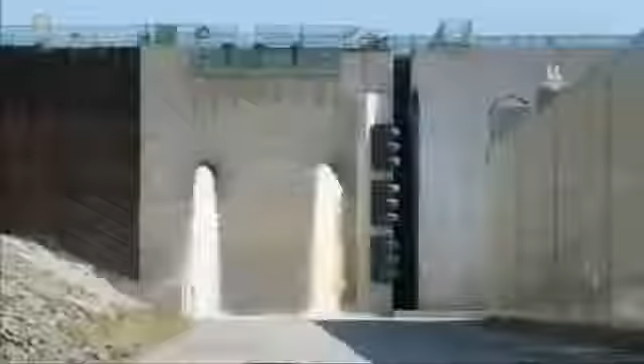Your next vacation may be spent in a paradise you've never heard of. You'll just need a way to get there. Here's the catch. That way has to go underwater. It would become the deepest immersed highway on Earth. Oh, they also have to build a couple of bridges. And did we mention the typhoons?

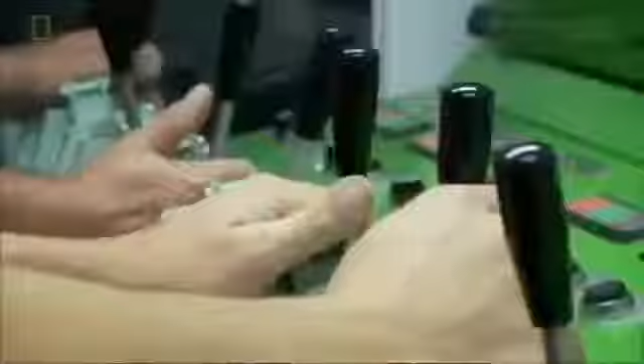These tugs are towing a contradiction. A tunnel segment that's both colossal and fragile. Come back, close. Slow down. A raft of techno breakthroughs and untested results. Bound for a place few know, to entice the world to visit. And even sway the choice for the Olympic Games.

Busan is South Korea's second largest city. 4.2 million people. Bigger than Madrid, closing in on Milan, and as hectic as Manhattan. South Korea is an Asian tiger, and Busan makes it roar. Its skyline will soon include one of the world's tallest buildings. It's the nation's biggest port, and the 5th busiest in the world.

Every 3 seconds, they unload a container. It's so busy, they had to build the sprawling Busan New Port. And still, Busan grows. Busan is such a comer, it's bidding for the 2020 Summer Olympics. But Busan has one big problem, and it's on display here at one of Asia's biggest fish markets. Dozens of vendors cram in here, 14 hours a day, every day of the year. And that's the trouble with Busan. It's so crowded, it's running out of room.

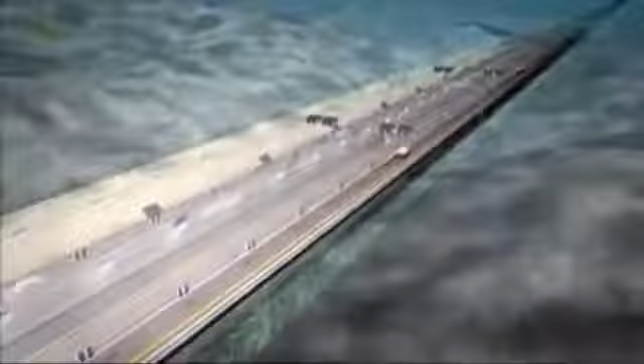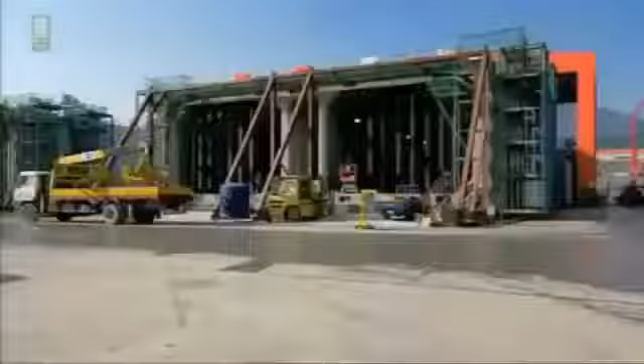The tunnel will be composed of 18 mammoth segments, each as long as 2 football pitches and as heavy as an aircraft carrier. Wide enough to carry 2 lanes of traffic each way, with an access tunnel between. That's the concrete reality. Now, here's where it gets dicey. Each segment has to be carefully towed into position, then carefully sunk to the seabed. And all the segments have to align within 35 millimeters, less than a thumb's width.

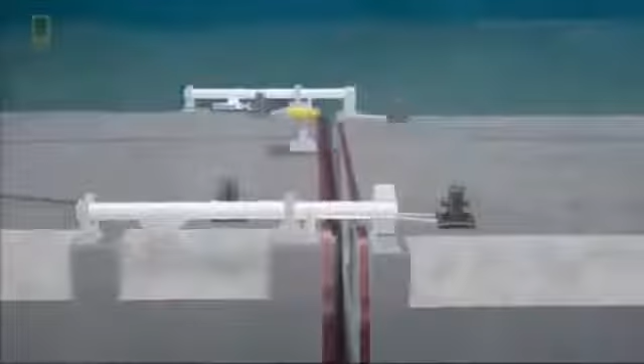Weather adds its own demands. This site is exposed to the open sea. There are always high waves, and the water is deep as well. It is wide open to the Northwest Pacific Ocean, so we have extreme exposure conditions for the construction period. So we've got to be ready for whatever that sends us, like big swell waves, strong winds, and even the occasional typhoon.

Building a tunnel like none ever seen will take techniques like none ever tried. Yet the Koreans have never built an immersed tunnel. But this country has. The Dutch have 5 centuries of experience at holding back the sea. Tunnel immersion is actually a Dutch speciality. If you look at the number of immersed tunnels in the world, most of them are in the Netherlands.

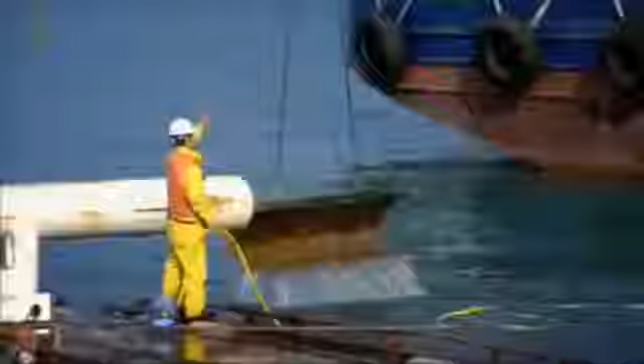Construction begins with the tunnel entrances. One on Gaduk Island, the other near an uninhabited island. From here, engineers will dig down to 12 meters below sea level to meet up with the undersea tunnel segments. But they won't tunnel through the seabed itself. If they did, the gradient would be too steep for driving. Instead, Peter's crew will lay prefabricated tunnel segments on the seabed.

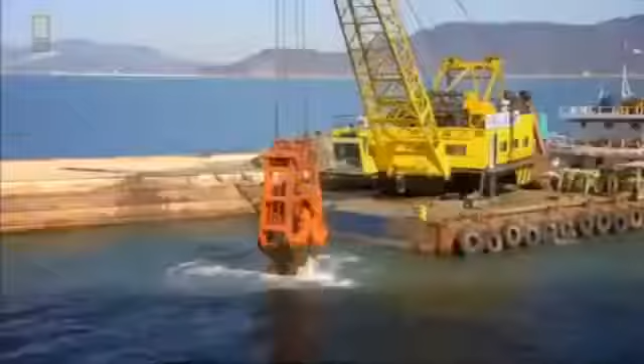First, engineers dredge a trench where the tunnel will rest. To buttress the foundation, they bore concrete columns into the seabed, stopping 3 meters shy of bedrock. The reason? Earthquakes. Avoiding bedrock will give the tunnel crucial flexibility. The segments will rest on a bed of gravel to ensure an even surface.

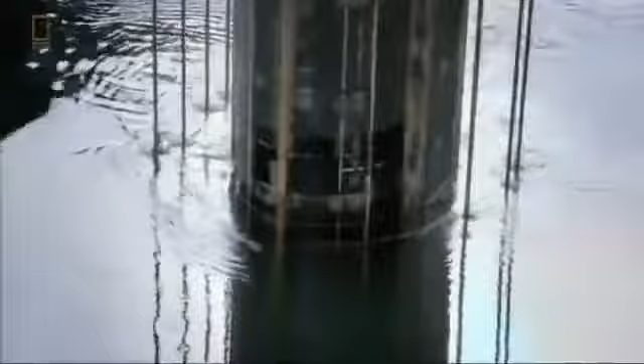Because the bed determines the exact height of each tunnel segment, the gravel must be placed with pinpoint accuracy. Later, the entire tunnel will be covered with thousands of tons of crushed rocks to protect it from collisions with ships or anchors.

Because the tunnel segments will be prefabricated, the first challenge is finding land for a construction yard. Not an easy task in Busan. If you look around, there's not a single metre of flat land anywhere that a contractor can use as a base for the construction period. From the tunnel site, the closest spot lies 35 kilometres away. It's big enough to build up to 5 tunnel segments at a time.

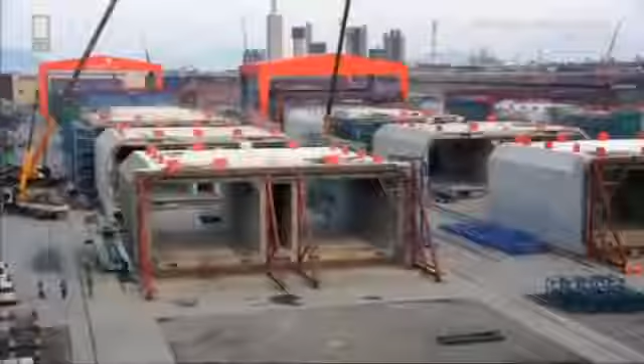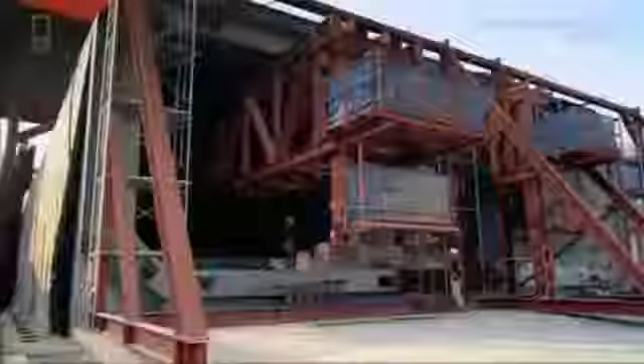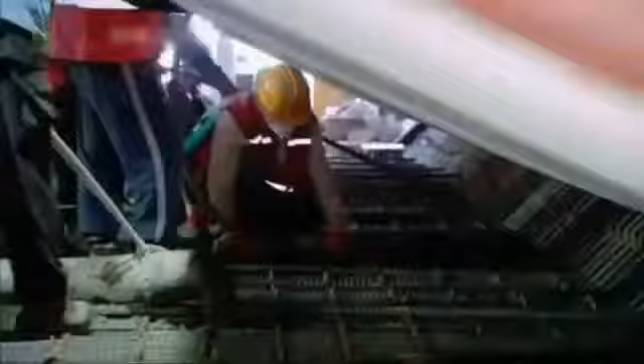Each segment weighs about 48,000 tons and is made of 8 subsections, each twice as long as a London bus. Anyone with a basement knows water can penetrate concrete joints, potentially disastrous in an underwater tunnel. But each giant section is cast without a single joint, thanks to Korean ingenuity. We continuously poured full sections from the ground up to the top of the walls to eliminate gaps in the walls. A process lasting 24 hours.

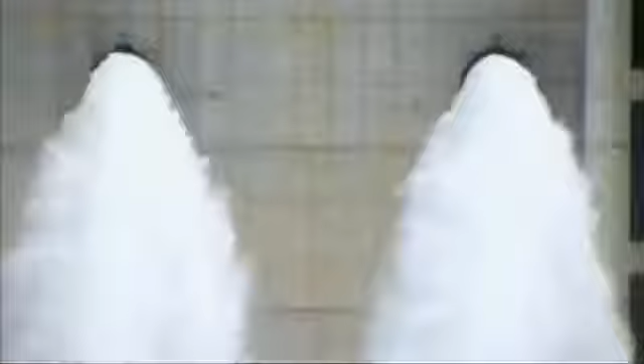After casting, the ends are sealed with steel bulkheads, a Dutch innovation best appreciated later on the bottom of Jinhae Bay. The bulkheads are watertight because these babies are about to take a bath. Flooding the dry dock will allow them to float the segments out to sea. The inundation of the dock takes approximately 48 hours.

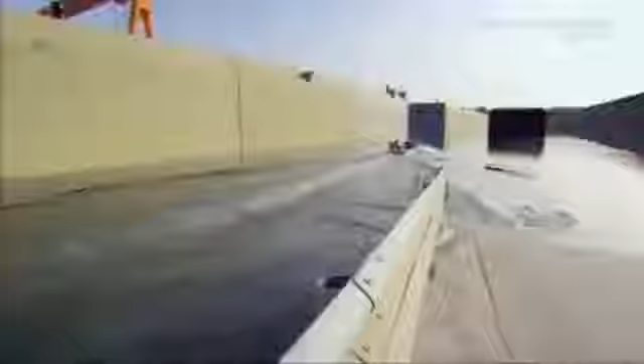During the first phase, we let in water until it reaches the level of the bulkhead door. Then we'll check to see if the bulkheads are leaking. Once all the leaks are repaired, or if there are no leaks, we'll fill up the dock completely. It's enough water to fill 230 Olympic pools. So how do you prep 48,000 tons of dead weight to float? Inside every tunnel segment, there are 6 ballast tanks, and they're filled with water.

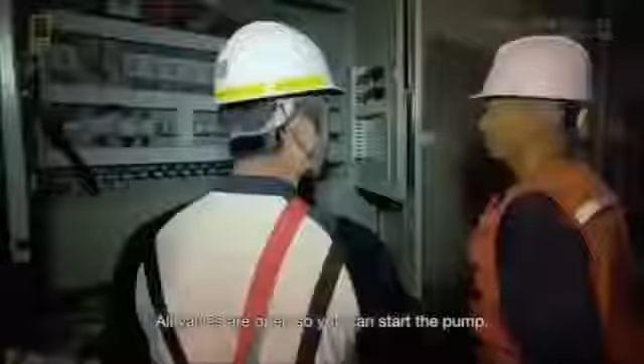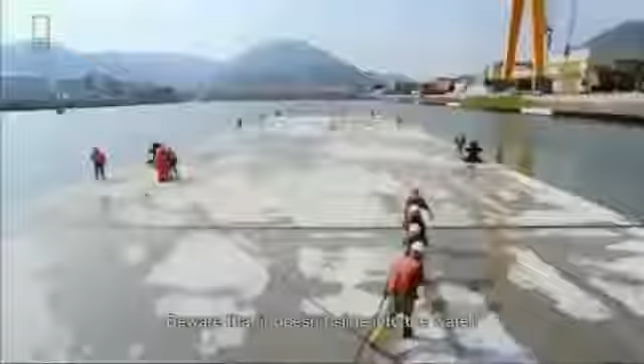To start the flotation process, we begin pumping out the water. We continue until the tunnel segment starts floating. So what the tugboat has to do is to tow that slow. Then with the other winches at the backside, we control the tunnel element's sideways direction. Now they can begin to warp out the segment. Removing the first segment takes brawn and finesse to avoid colliding with the dry dock. With barely 2 meters on each side, there's no room for error.

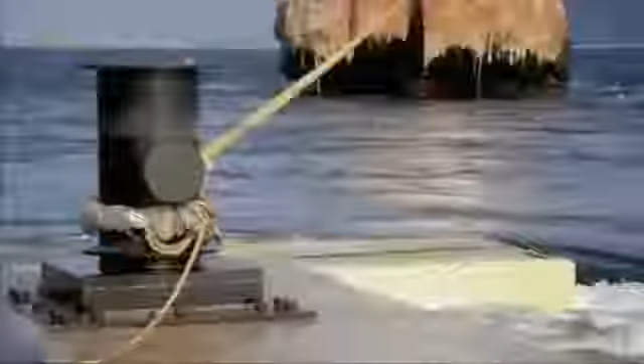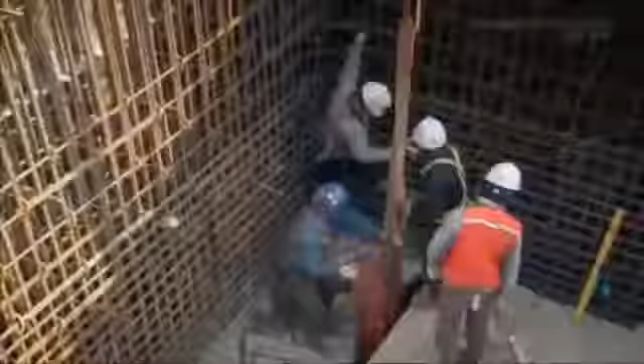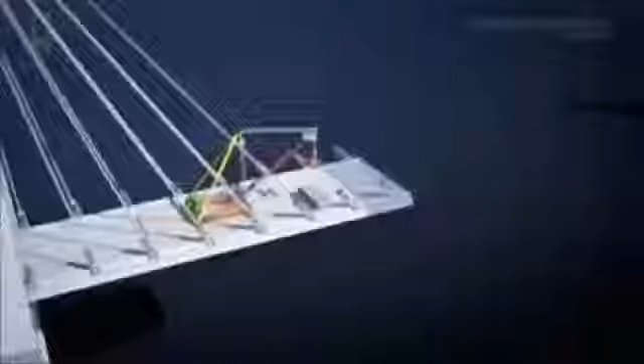Believe it or not, clearing the dry dock was the easy part. While work continues on the undersea tunnel, the rest of the Busan-Geoje fixed link starts to rise. 2 giant bridges. One with 3 pylons, the other with 2. At its topmost, the 2-pylon bridge will soar 156 meters above sea level, the height of a 50-story building. The span between the pylons will stretch the length of 5 football pitches, with enough room for the tallest freighters to pass under. Crucial for a city that thrives on shipping for its livelihood.

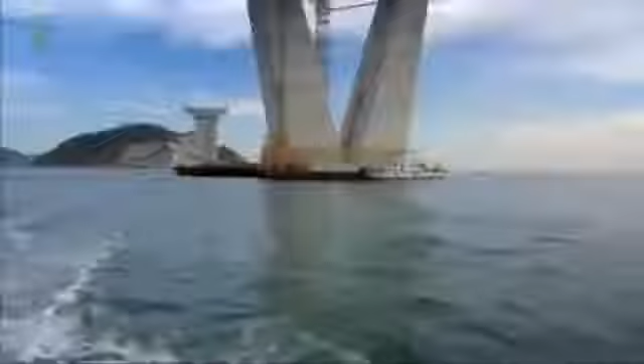The most pleasing aspect of the bridge is also the most daunting: its curved diamond shape. Of course, curved pylons are very difficult to construct, but they're very much in harmony with the surrounding scenery in many ways, in that they bear resemblance to a mother's praying hands and to the wings of seagulls.

35 kilometers away, the first 5 tunnel segments arrive at a temporary mooring site. From here, they'll travel across Jinhae Bay to their resting place on the sea floor, already leveled and lined with gravel. And here's how they'll get there. Pontoons the size of a mansion. Dutch designed, Korean made. One pontoon is positioned near each end of the tunnel segment.

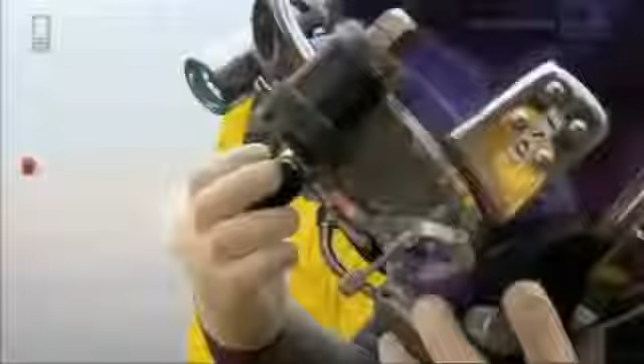After arrival at the tunnel site, mammoth winches on pontoons will lower the segment to the seabed. At least, that's the theory, because it's never been done in the open sea. A specialist diving team prepares the first tunnel segment for the immersion operation. Divers test connections for data systems and power supplies. Standing by. And remove marine growth from the bulkhead.

Down on the wire, please, Steve. Down on the wire. Finally, they install steel wires underneath the tunnel segment, crucial for positioning during immersion. In a good position now, we can come up on the wire. Coming up on the wire. Above water, the crew are also adding a temporary access tower, so workers can enter the segment in case of trouble with the ballast tanks. Over, the tunnel is clear.

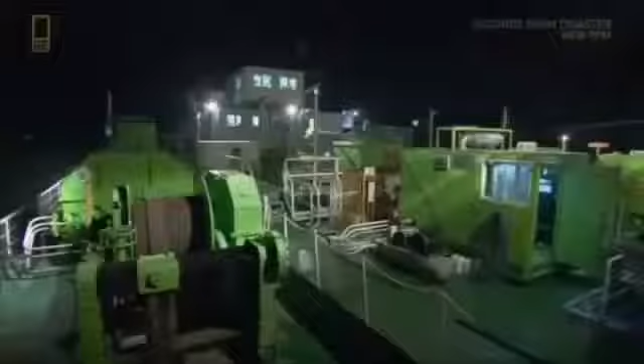Every problem has to be anticipated, because if things go south, they won't get a second chance. What we do doesn't have anything to do with luck. We know what's involved, we know how the process works, and we have the feeling we control the whole process. Not quite. Back in Holland, the rest of the immersion team stands by to fly out. In all, 56 men wait for Peter to say go, and he's waiting for a forecast.

When the wind blows from the south, swells roll in from the Pacific. Because we're situated offshore, we have to deal with waves. And these waves can be pretty fierce. Even swells barely 30 centimeters high pack so much force they could fracture the subsections that form the tunnel segment. Throughout its journey, the segment will be at the mercy of the waves, so the team needs 3 days of calm seas.

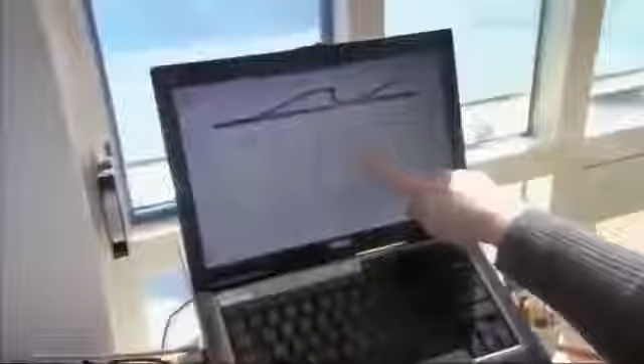Strukton looked around for a forecaster, but few dared to stick out their neck for such a costly guess. Then, a Danish company seized the challenge. They came up with a model to predict waves as small as 10 centimeters, up to 5 days out. A stunning breakthrough in forecasting. That means we're able to say, tomorrow we can do an immersion. And that means we're able to put people on the plane yesterday, really on a last-minute basis. It takes away a big risk for us and for our client.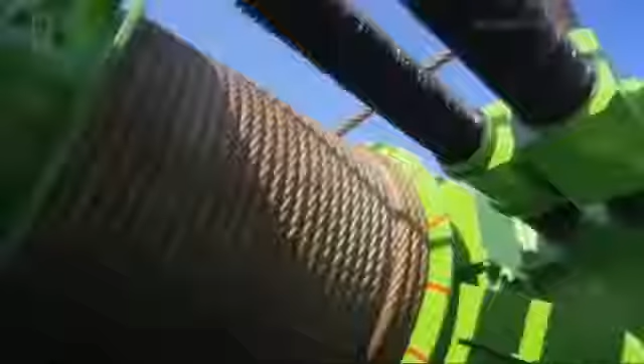We've got the weather. They're all showing the same prediction. The swell still not as bad. I would say we have a go. Green light. We'll try. Then we'll try it. Okay, thank you. Yes, bye-bye. Ahead lie 48 hours of tension for the boss. Six months of work rides on steel threads and a forecaster's guess. Tonight, no one will sleep soundly.

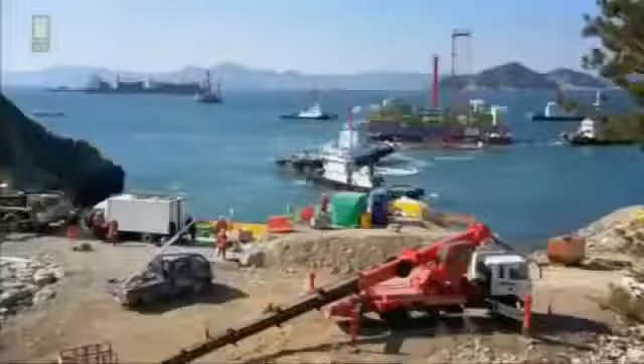After a cautious voyage at 3 kilometers an hour, the first tunnel segment arrives at Gadeok Island, the starting point of the tunnel. Joining Peter is the elite team fresh from Holland, among the few men on the planet who can do this job.

Aligning the segment takes painstaking accuracy. Surveyors take readings using a system of prisms and mirrors mounted on the access shaft and the survey tower. It's all new to the Koreans, so it takes time getting used to the technology.

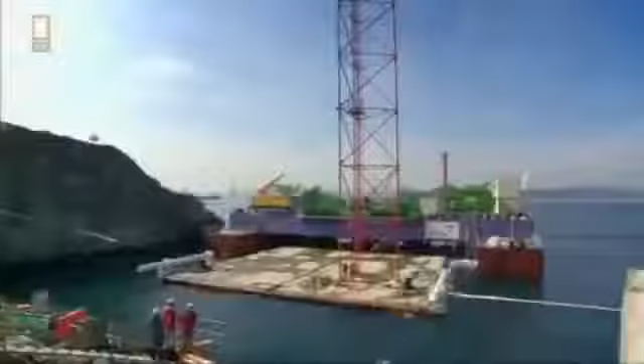The ordeal will take all day and end either with an engineering triumph or a 48,000-ton disaster. With so little clearance and so much at stake, the segment moves at a snail's pace. After a journey of 35 kilometers, it's now just 4 meters from the abutment.

We've worked really hard for half a year to prepare for this moment. 56 of our people are here to execute this operation. The Koreans are excited and tense because they've never witnessed this. We've done it more often, but still, a very special moment.

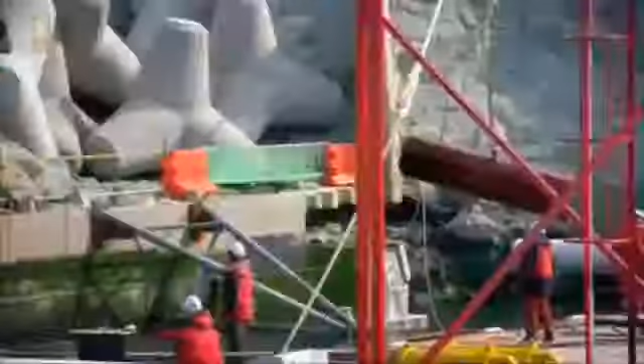Till now, steel plates have protected the leading edge of the segment. Easy down. Behind them is a component as crucial as it is fragile: a rubber gasket to ensure a watertight connection with the abutment. Now they're ready to begin the descent. Operated by remote control, the ballast tanks slowly fill. The command post monitors everything via remote control cameras, on the pontoons and inside the tunnel segment.

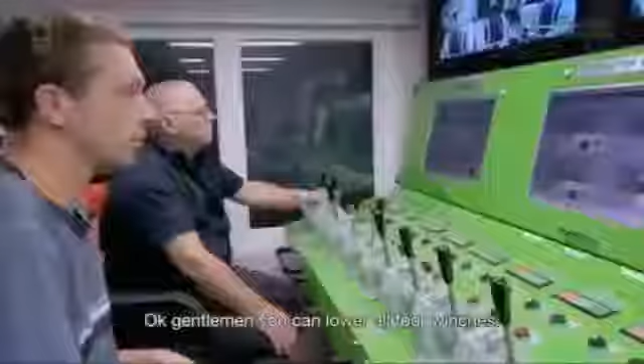The segment must align with the mouth of the tunnel to within 3.5 centimeters. You can imagine that if this segment were placed 10 centimeters off and you did that 18 times, you'd end up 2 meters off on the other side. Well, that wouldn't be very good.

7 hours later, touchdown. The segment now rests just 50 centimeters from the abutment, the mouth of the landward tunnel. To close the gap, engineers have installed a pair of powerful hydraulic jacks. Linking the jacks and applying tension closes the gap. The final stage begins from the landward side.

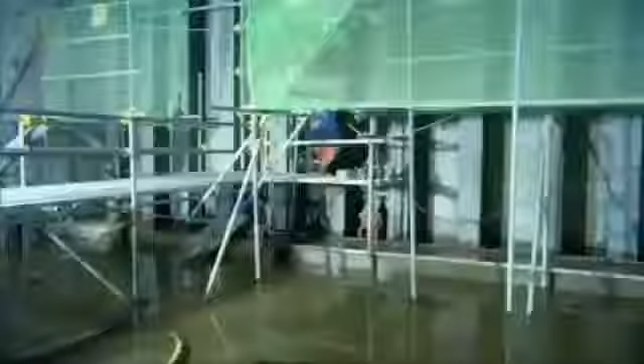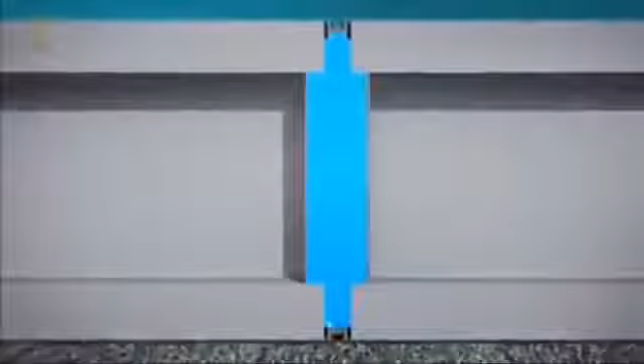A wall of water nearly 3 meters wide separates the segment from the abutment, what they call the immersion joint. Opening this valve will force the water out. As the immersion joint empties, external pressure will further compress the gasket for a watertight seal. The echo from the bulkhead reveals the water level in the joint. With the water drained, they can open the bulkhead door.

But the lock's jammed. You knew that it was going to break? Huh? Did you know that? Because you took the toolbox with you.

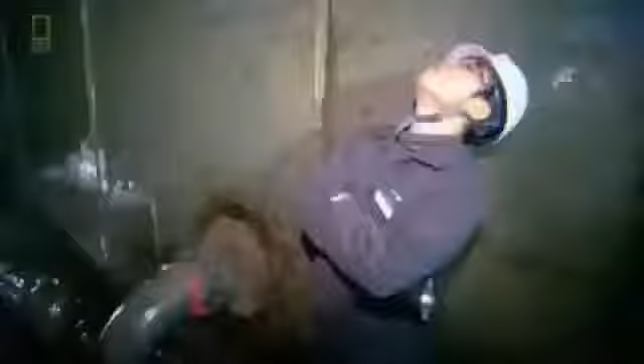This calls for cruder technology. All that stands between the crew and the first immersed segment is the steel wall installed back at the dock. And here is why it's so brilliantly simple. On other tunnels, engineers seal the ends of segments with concrete, then knock it out after immersion. But that takes time and creates debris.

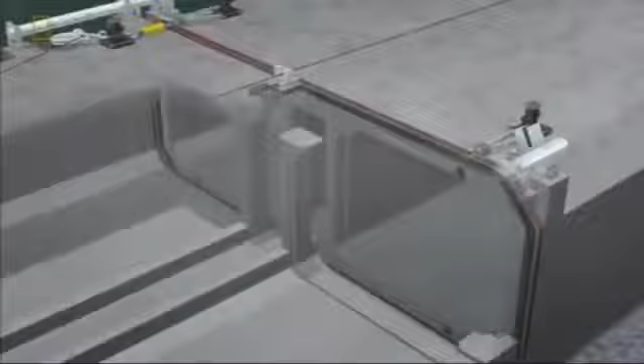The modular steel bulkheads are easy to install, easy to remove, and they'll be reused on every segment and eventually recycled. Faster, cheaper and safer. An engineering trifecta. Finally, open sesame. Although we experienced some unexpected things, we were very happy that it was completed successfully in the end. And the feeling of accomplishment was indescribable.

Their marathon operation lasted almost 78 hours. Some have gone 2 days without sleep. One down, 17 to go. And they won't all go smoothly.

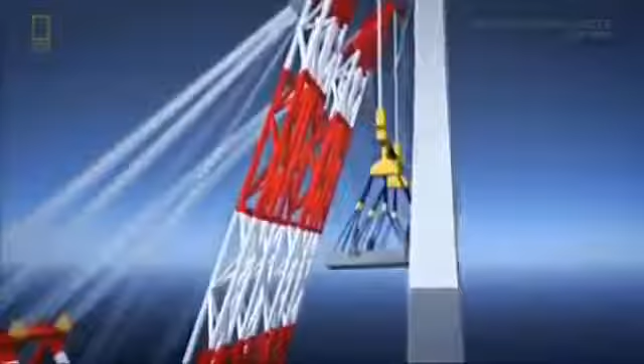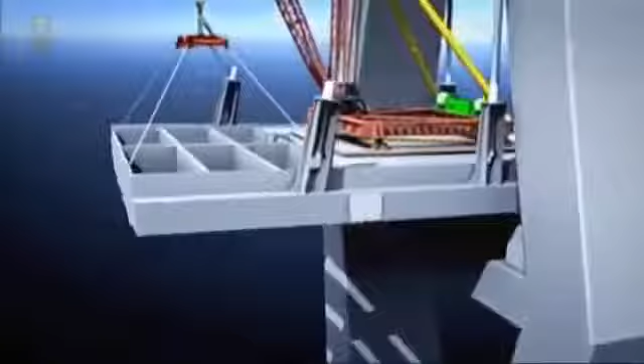Like the Busan tunnel, the bridges advance in segments, but 2 at a time, not 1. It's called balanced cantilever construction. Working outward, steel segments are laid on each side of the pylon to keep the bridge in balance. Then 2 cables are attached to brace the segments. Once they've done that, the derrick crane then lifts up 6 precast concrete panels and places them onto the steel frame.

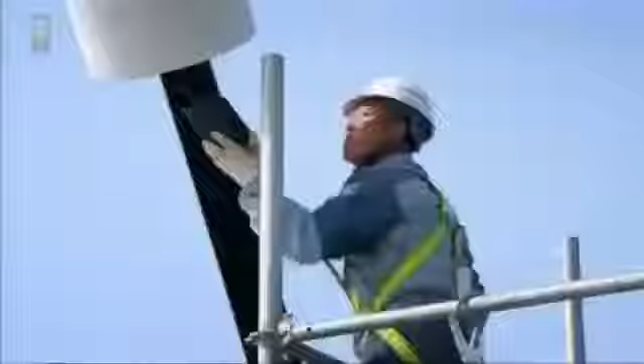Then put a final post-tensioning into the cables. And we're ready then to start the whole thing over again. Back at the tunnel, the team have installed 12 concrete segments. But now they're heading for 48 meters, the deepest water and the hardest challenge.

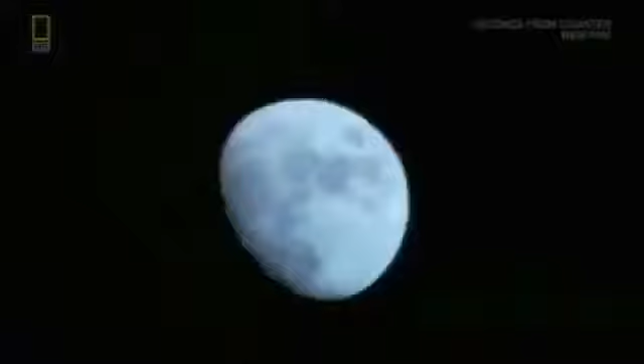New hurdles demand new techniques. The sea floor out here is soft clay, so they need to set anchors that can hold the segment and pontoons fast. Stevmantas, named for their fish-like shape. They're designed to dig in where other anchors lose their grip. Once segment 13 arrives here, 14 steel cables connected to the anchors will hold it in position.

But once again, deep water raises the stakes. Once the segment hits the bottom, suppose a problem arises with the ballast tanks. Somehow, Peter would need to get the engineers inside. On segment 1, they could use an access tower, but not in deep water. The solution is a first in tunnel immersion, a self-propelled diving bell. Purchased in America, the sub was refitted just for this project.

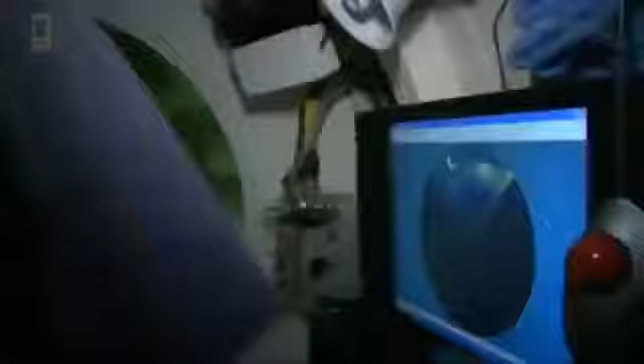We're coming down to 15 meters, see if we can get the tunnel on sonar. This is the tunnel element here. That's probably a bollard on the corner.

With a little boat like this that can go to 300 meters, you've got the concept of a ferry transferring people to the tunnel segment. It's 9 meters long, with room for a pilot, co-pilot, and 5 engineers. It can dock on a landing tower on the segment for watertight access to the tunnel.

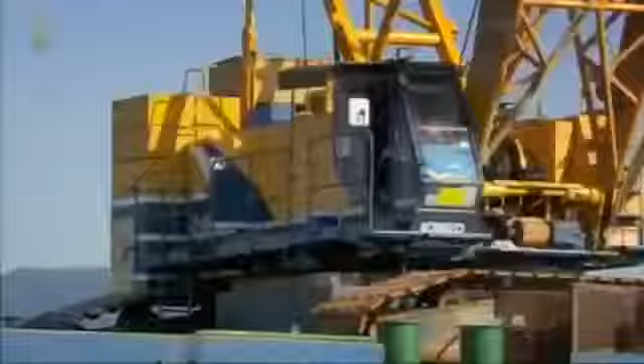Deep water poses another problem: monitoring the position of the segment as it's lowered, because one misalignment would be disastrous. To calibrate the position of the first segment, surveyors took readings from prisms mounted on the access tower. But remember, there's no access tower here. So once more, the Dutch devise a smart, simple solution. It's named for what it is.

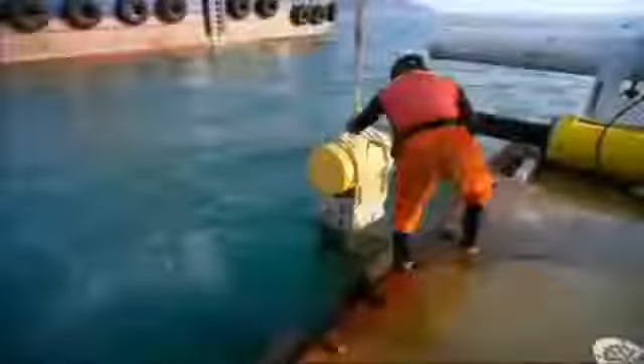A taut wire. One end attaches to the leading edge of the segment to be immersed. The other end attaches to the previous segment. The taut wire ensures the connection stays under high tension. Positioning the device is a delicate operation. This custom-made model is the only one in existence. Breaking it is not an option.

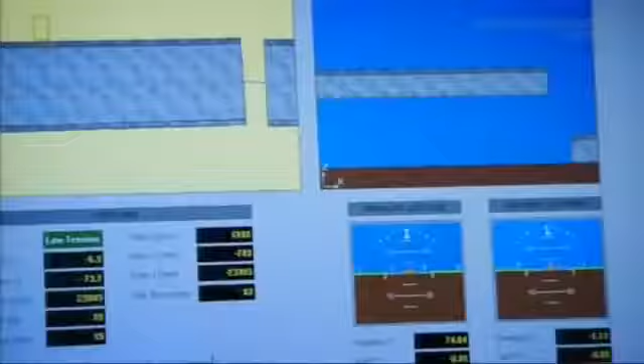When this segment descends, a computer will record the length and angle of the wire, allowing the team to monitor the segment's position. The taut wire is now under high tension between this segment and the previous one. And as the segment descends, the wire automatically retracts and becomes shorter. So that provides us with exact positioning data.

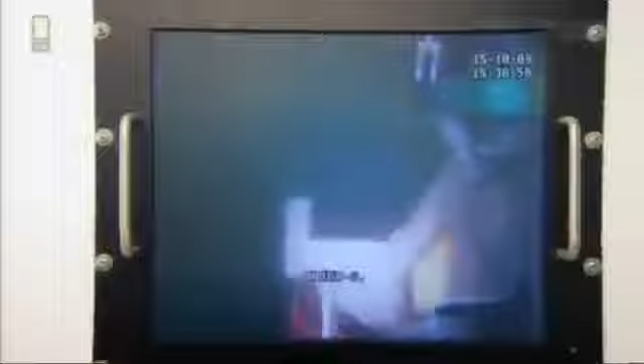To fine-tune the position of the segment on the seabed, 4 of these sensors are attached, one on each corner of the bulkhead. Another custom innovation for this project. And wait till you see how accurate they are. The whole operation is remote controlled from the command unit on the pontoon. With one click, they start filling the ballast tanks.

You can feel the tension building up now. And then we all have one question. Can we do it again? Can we get it in position? It's the same tunnel, but it's farther away from the coast. It's deeper, the weather, everything. So many aspects make it different every time, so you have to stay alert.

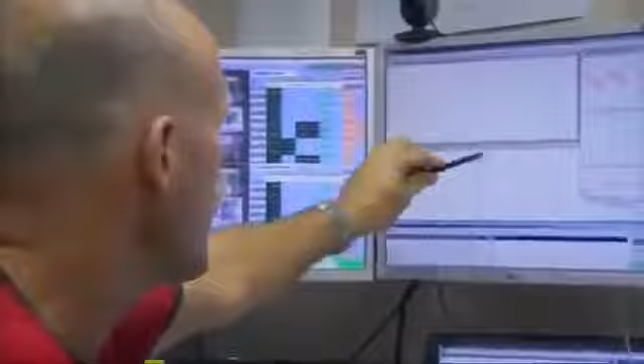All the data feeds into Peter's computer and refreshes the position of the segment every second. This is the tunnel where we have to go to. The green one is the final position, and this is where it is now. So you can see it's just below sea level.

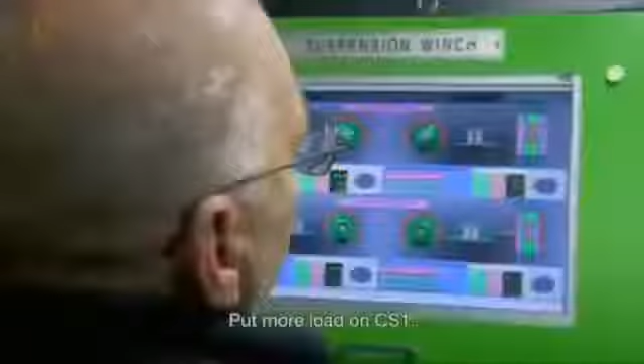Data from the winches allows him to adjust the segment during descent. It all happens like walking downstairs. One step forward, one step down. And the deeper it goes, the more careful the steps.

At this stage, where the tunnel is just a few meters underwater, there's no problem. We can still move in any direction. Nothing can hit it. But when we're approaching the segment that's already on the bottom, then I have very little clearance, so the steps I make will be a lot smaller.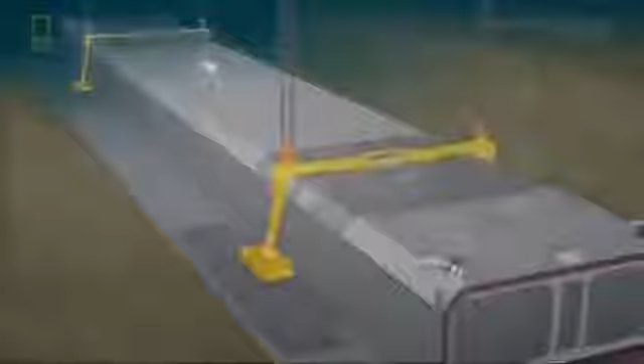The moment we pull them closer together, the guide beams become less flexible. The movement diminishes until the segment is motionless. With only 50 centimeters separating the segments, and in near zero visibility, a diver connects the hydraulic jacks. The segments seem aligned, yet the slightest error on this end will translate into a big mistake at the other. But the Dutch don't miss a trick.

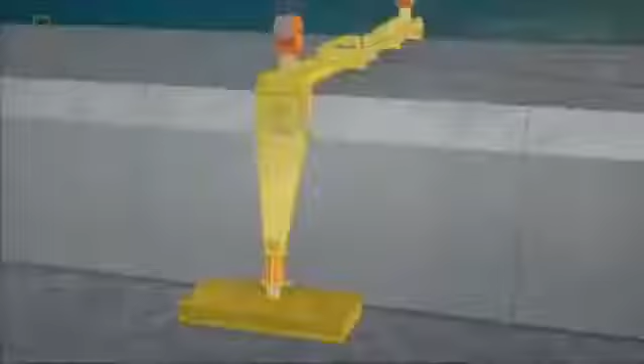Even on calm days, the swell is so heavy and the segment is so long, stability is a problem. The solution? The External Positioning System, or EPS. Yet another Dutch invention based on a simple idea. A pair of hydraulic legs and extendable feet to hold, lift and move the segment.

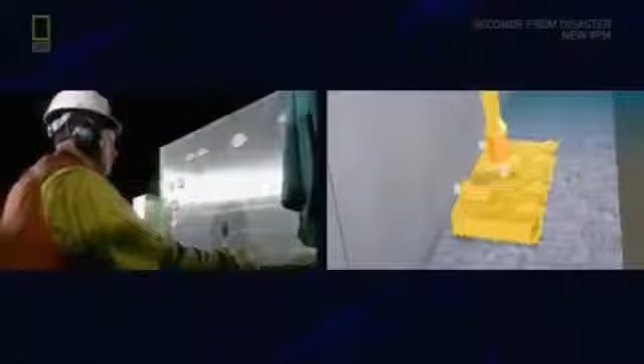Connecting each pair of legs are 4 steel cables, already installed back at the mooring site. Braced on its robot legs, the EPS laterally aligns the segment into its correct position. Now, the jacks are tightened by remote control, compressing the rubber gasket.

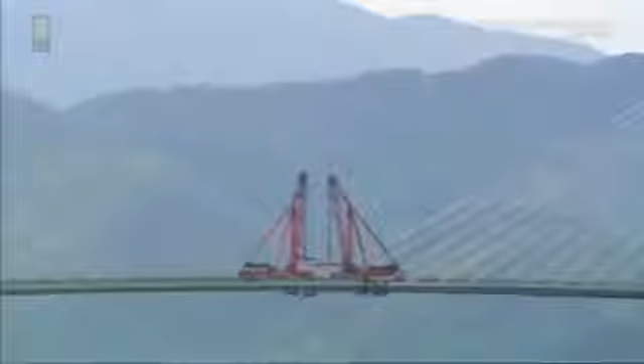Done. One more segment complete. Like the tunnel, the bridges approach the final stages. Before the 2-pylon bridge can accept its last section, engineers have to perform a stretching exercise, as tiny as it is powerful.

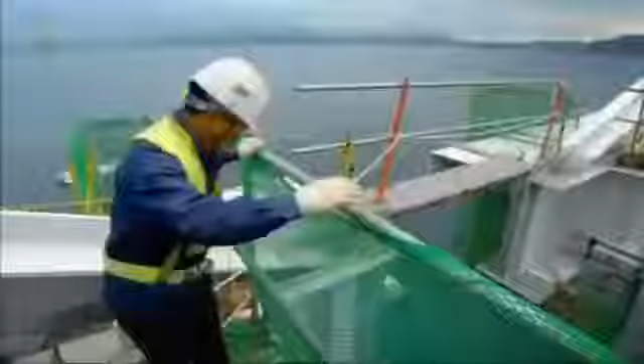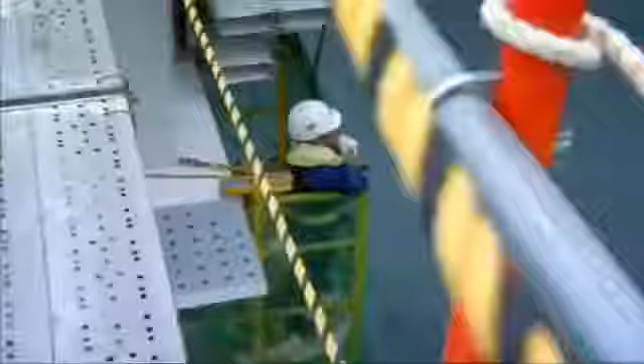Both pylons have to be pulled back about 7 centimeters to create enough space for the key section to be placed. Once the tension is released, the final section will have a tight fit. After 6 years, they must be eager to finish. But just like the tunnel crew, they have to move in baby steps. Because this baby is a giant.

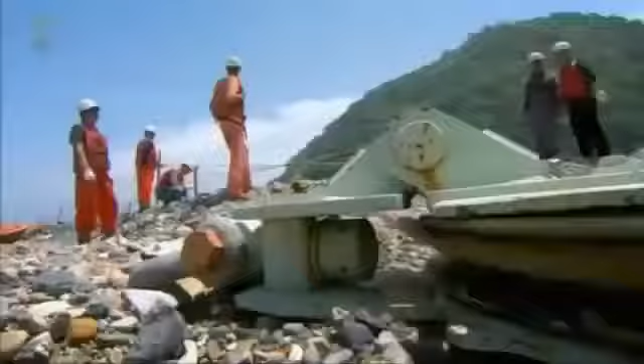A few kilometers away, Peter's crew prepares to install their last segment. Just like the first segment, number 18 has to be maneuvered between rocks. As before, they run some of the anchor lines from the pontoons to the rocks. Because it's so close to the island, it's very difficult to install the immersion wires. Connecting them isn't easy by any means. It's not just a matter of simply pulling them in place.

With all cables attached, they can start maneuvering the segment into place. Because this segment is extremely heavy, we can't afford even a small mistake. Light contact can cause huge damage to the segment, and that kind of damage can set back the entire project. After 3 years, they'll open the last tunnel segment tonight, if all goes well.

The segment hits the bottom, but there's trouble. One end is sitting 28 centimeters too high. We're now trying to figure out what the cause is. We don't know yet. It's a major problem at the moment. We're taking about half an hour to go through all the steps so that we don't miss anything, and then I'll inform you about the situation.

The gravel foundation under one of the EPS feet is overbuilt, so they'll have to remove the foot. And the grand opening will have to wait one more day. After final adjustments, the last tunnel segment now sits squarely on the sea floor. All that's left is entering the tunnel to seal the joint with the final segment. They'll enter via the tunnel entrance on Gaduk Island. It's the last time Peter will make this trip.

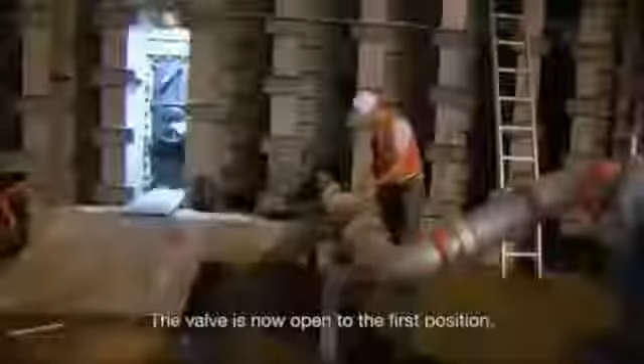The last step is pumping water out of the immersion joint, so the segment can close up for a tight seal.

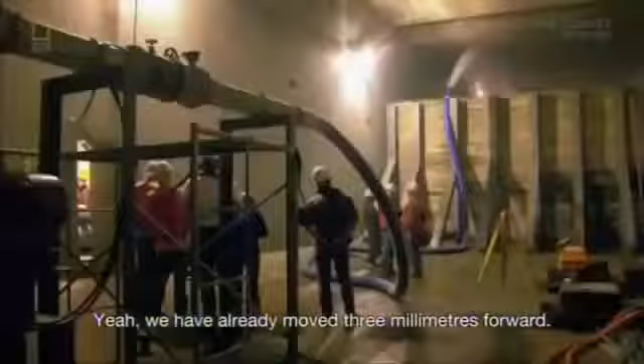They always celebrate this step, but today is the grand finale. Once complete strangers, now firm friends, and soon to go their own way. The end of their long journey lies behind this bulkhead door, and the honor of opening it falls to Peter.

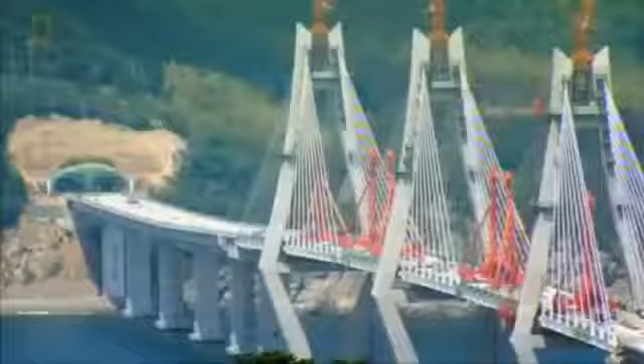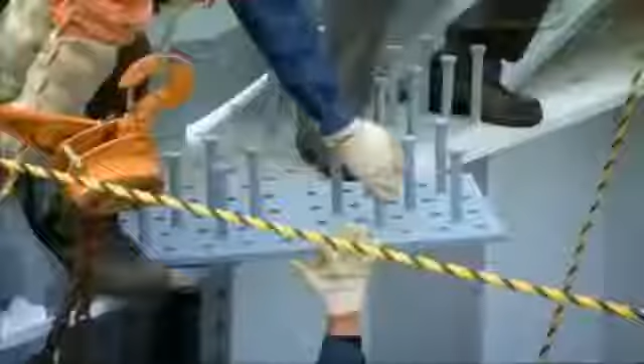Back at the bridge, the final section is lifted into place. Once the tension on the towers is released, the whole structure will be locked in place. With the bridge complete, all that remains is opening the final segment of the tunnel. Last inspection.

Really extremely proud that we did it, and happy, of course. Happy for the whole team. It's just great. After all this time and after a difficult operation, we did it. Very emotional, yes. Fits the moment. I'm proud. So proud. Yeah. Come back.

For Peter's team, the tunnel marks another success on a stellar resume. For the Koreans, it's a chance to join the Dutch on the world stage. Actually, this was the first immersed tunnel project in Korea. And we developed lots of new equipment, and we trained lots of engineers, and eventually we could finish in time, and everything is happy. This isn't just a shortcut to an island. It's a path to the future.